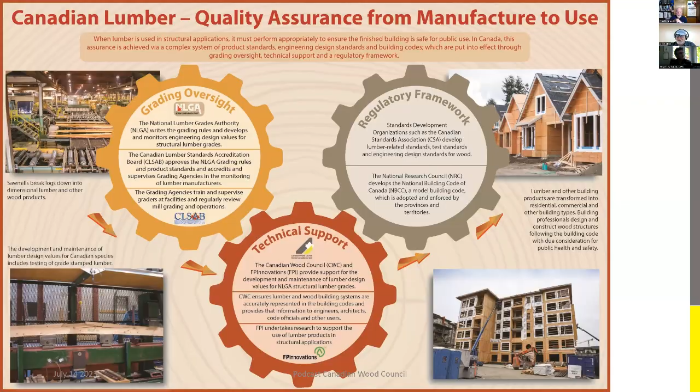Yeah, we have the American Wood Council, and we have a number of other groups that we work with: the APA Engineered Wood people, Woodworks, Think Wood, and SLB. American Wood Council is very closely aligned with the Canadian Wood Council. We both deal in codes and standards work, and actually Canadian Wood Council is a member of the American Wood Council.

Actually on Sunday, I'm going over there for their annual set of technical committee meetings for the whole week. Where are they located? They're in the Washington, D.C. area. Okay, interesting.

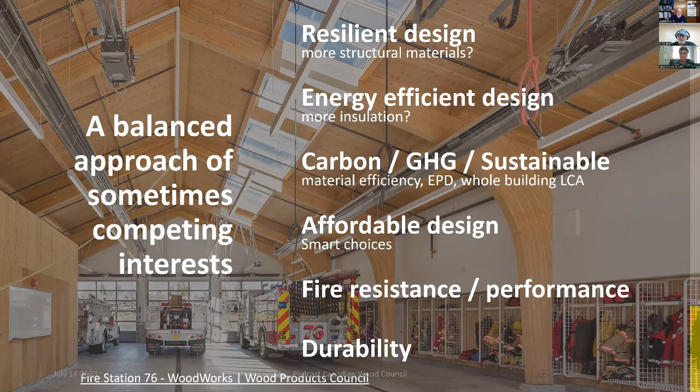Now, we called this show Building Science and Wood, a balanced design approach. Can you talk a little about what is meant? What should our overall philosophy be in designing? Let's start with that and then get into more about the balanced design approach. Sure, yeah, there's a whole pile of competing aspects to designing a building.

Sometimes I say competing because, for example, with resilient design, you may want to use more materials. You likely want to use wood sheathing to resist the wind and seismic loads for your building. But some builders in certain locations say, hey, I have another panel product called insulation, and I want to use that instead of the wood sheathing. So that competes with it. Now, of course, you can use both—you can use the wood sheathing and on top of that put some insulation.

That's the best approach, but there's also the affordability side of things. So which one do you pick? Again, you want to pick both, but it does play into the decisions builders make. So we have resilience, we have the energy efficiency aspect, we have the affordability aspect.

Now, when we go back to energy efficiency, the more insulation the better, right? You want a highly efficient building envelope. But that impacts the carbon footprint, and there's huge scrutiny worldwide now, certainly in Canada, about having a decarbonized environment—low carbon materials. So you don't want to pick too many materials, and when you do pick materials, you want ones with the best carbon footprint available. Then, of course, there's fire resistance and durability as well.

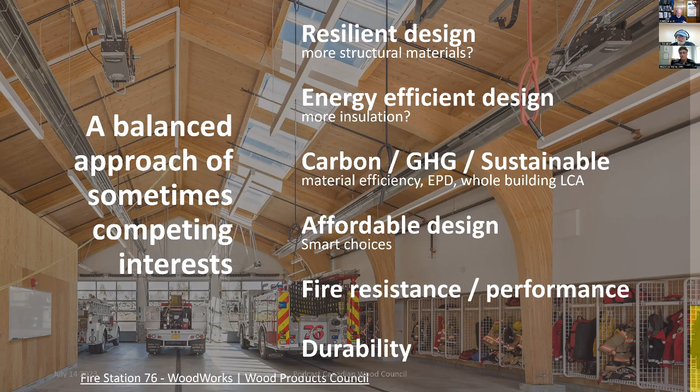I've got in my notes from talking with you earlier in the week that a wood frame house can resist an EF2 tornado. Is this any wood frame house, or does it have to be built in a specific way?

That's a good question. There's even a Globe and Mail article, a Toronto newspaper, that talked about whether houses are keeping up with extreme weather, and I gave an interview for that. In general, wood frame homes perform very well historically, both in the US and Canada, in even the worst of earthquakes, with just a few details paid attention to. They act very well, but no, not all homes can.

This is actually very front of mind today for me, because just yesterday there was probably an EF0 or EF1, very low tornado, but it still wrecked 125 homes only a few miles from my house. It was a close call. So that's first and foremost in my mind, that component about resilience.

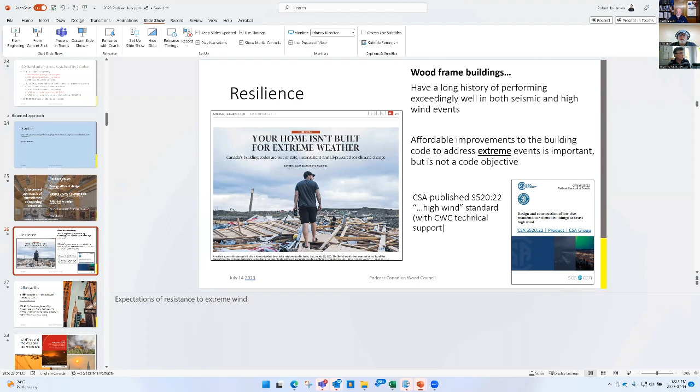We do have some strategies, and they are in this S520 standard. It's a brand new standard in Canada that deals with how to make sure your home is highly resistant. I'm going to go to this slide that describes what I talk about in about an hour-long presentation, and boil it down to about 2 minutes here - how to design a highly wind resistant home, based on the concepts of that CSA S520 standard that's just brand new.

It was published in 2021 or 2022, I forget now. First step: making sure the roof sheathing is attached well. The standard describes a better way of ensuring that the roof sheathing is fastened well. If the roof sheathing lifts off, your house is going to be toast from either water or the extra wind load that hits it.

Then gable end roofs - those triangular portions of wall that go up to the roof line on certain homes - those are very susceptible for a few reasons. One, they're not constructed as well. Two, they're higher up, so they have higher wind loads.

And then just making sure everything in the upper framing is connected to the lower roof framing better. Those things include chimneys, if people still have chimneys attached to their home, or even dormers. I've seen a number of houses where the dormer has flown off.

Ensuring, just like the roof sheathing, that the wall sheathing is attached very well, with nails that are perhaps even better than commonly used. There's something called the roof sheathing ring shank nail - it's kind of like a combination of a screw and a nail, and you can drive them in with power nailers, but those allow the sheathing to be fastened a bit more securely.

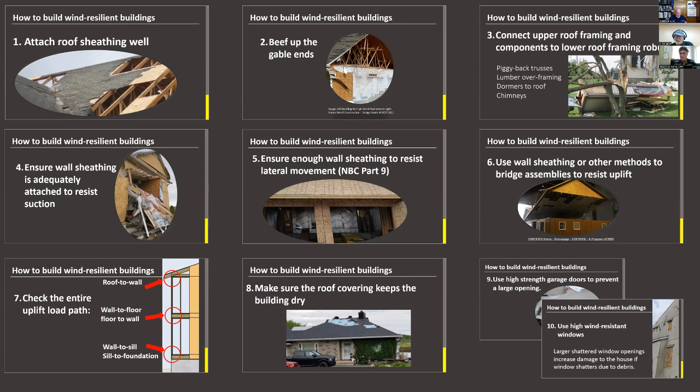Now, another topic we hear a lot about is carbon and climate change. I wonder if you could touch on that and how wood construction stacks up essentially with respect to carbon.

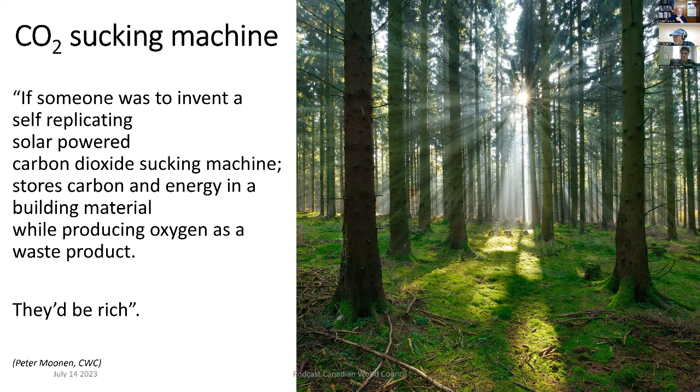Sure. I like to quote a colleague of mine first by saying, if someone was to invent a self-replicating solar-powered carbon dioxide sucking machine that stores carbon and energy in a building material while producing oxygen as a waste product, they'd be rich. It's my colleague from the Canadian Wood Council who says that. And of course, he's referring to trees, and they absorb carbon.

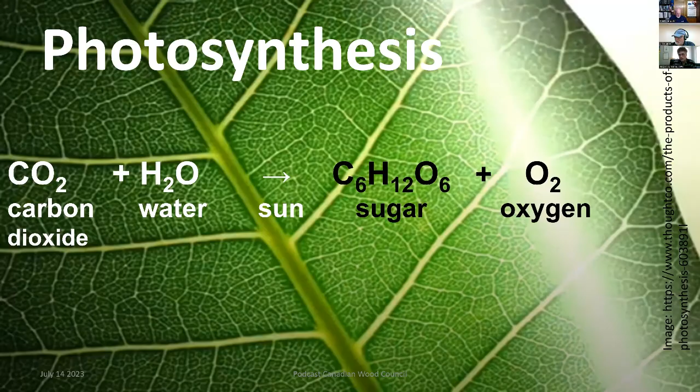They do this at their big plants, their factories of storing carbon, through what we learned in high school—photosynthesis—where the carbon dioxide goes in, combines with water and sun, and produces what ultimately turns out to be the wood, the sugar that converts to wood. Beneficial to everybody is the oxygen, so the carbon dioxide is then changed into oxygen. And what I like about that is the wood then stores the carbon from the carbon dioxide and releases the oxygen.

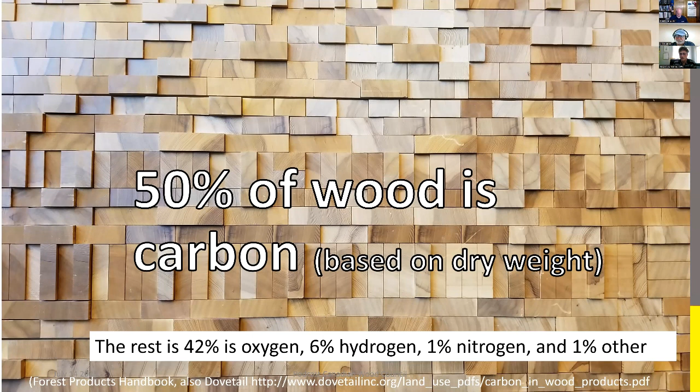And that's what the world is looking at as a culprit for climate change right now. So wood is 50% carbon—that's a fact you can look up in many places, including the Forest Products Handbook. The rest is oxygen, hydrogen, a few other things that are less important. I can go into details using the periodic table, if you'd like, about how the math works out, but chemistry wasn't my forte—that's why I went into structural engineering.

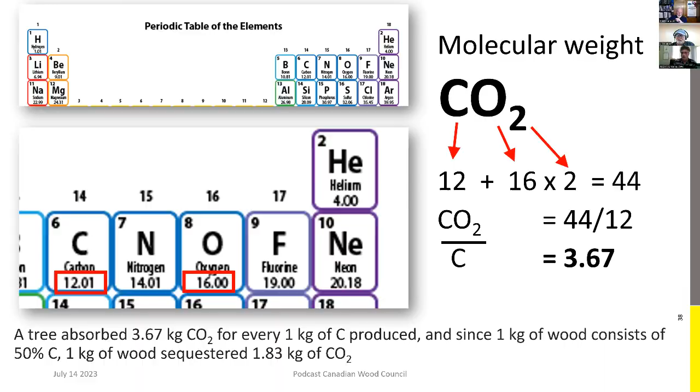But there's something called the molecular weight, and that's the comparison between carbon and oxygen. When you have carbon, it has a molecular weight of about 12, and oxygen is 16, and there are 2 oxygen molecules in carbon dioxide. So when you ratio the carbon dioxide over carbon, you get a ratio of about 3.67. That all boils down to, if wood is 50% carbon, and you do all that math with the periodic table, each kilogram of dry wood has sequestered over its life 1.83 kilograms of carbon dioxide.

You can think of it like this: we weigh roughly 200 pounds, but we eat a lot more than 200 pounds of food as we grow over our lifetime. The tree does the same thing with carbon dioxide. It's taking in carbon dioxide, sequestering it, and building up its muscle, call it, in dry wood. That's what's very beneficial to the environment.

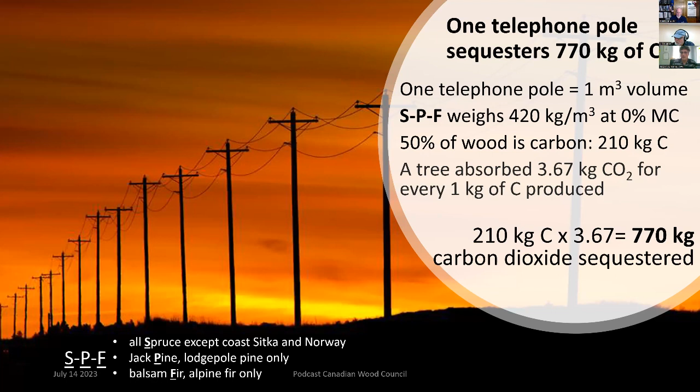Why do we care so much about this carbon issue? We care a lot because as we build more efficiently, in the last 10 or 15 years we've had this focus on building energy efficient homes. That's great, we're getting more energy efficient homes. But as we build those more energy efficient homes, the proportional impact on the environment due to the materials increases relative to the operational energy used to keep the house warm or cool.

And so that's why it's being increasingly scrutinized, what materials and the impact of those materials have on the environment. It's not just the operational energy in the form of operational carbon, but also what we call embodied carbon—the carbon that goes into the atmosphere as a result of making the materials. That's why we need to focus on carbon, and really we've got to focus on decarbonizing.

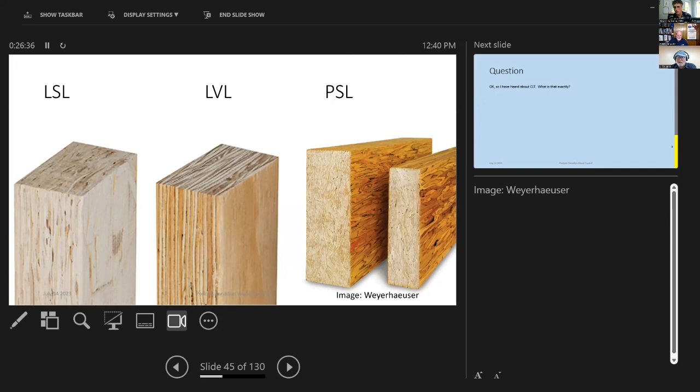These products I'm showing on the screen now: laminated strand lumber, laminated veneer lumber, parallel strand lumber. Those are all engineered materials that are also part of the mass timber family. But those are older ones, and I bet a lot of your listeners have heard of those before. They're very popular - rim boards, LSL all the time.

CLT is a little newer, but there's also even newer stuff coming around. Well, it's new and it's old - nail laminated timber has been around actually in some really old, 100-year-old buildings. But now it's part of some standards that have been developed. In Canada, at least, there's a new standard called CSA O325, talking about how to make sure the quality and performance of this is done correctly.

And that's just taking a bunch of 2x4s or 2x6s, not sure how deep they would go, and nailing them from the large side into the next piece. So the strong dimension is vertical - it's like a bunch of closely spaced floor joists, all tight together and nailed, forming very strong floors. They could even be stronger than cross-laminated timber because they're all in their strong direction. So that's another part of the mass timber family.

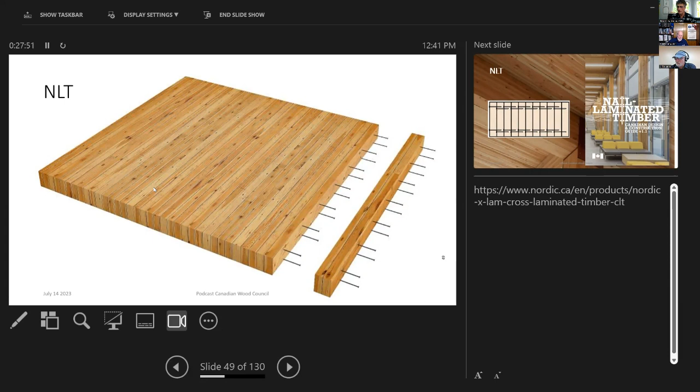And even newer, especially environmentally friendly, is something called dowel laminated timber. It takes the same concept - laying a bunch of 2x4s, 2x6s, or 2x8s on its edge - but instead of using steel nails, using wood dowels drilled in. That's really cool because the end-of-life story for these materials is really good; you can always reuse them. There's no danger of cutting nails with your saw, even on site, you can cut a hole in it without damaging your saw. So that's another mass timber product.

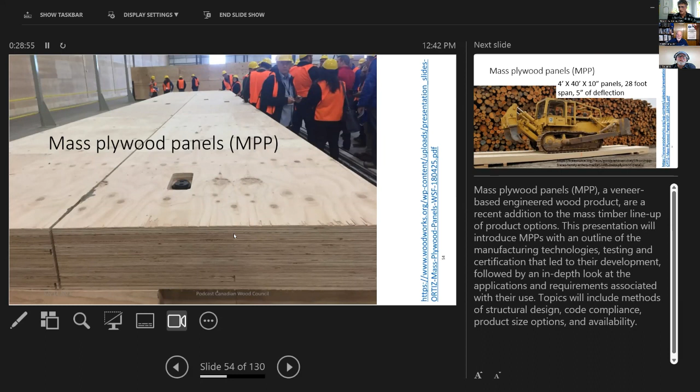And then the last one I'm not too familiar with, but I know is around, is mass plywood panels. So if you visualize going to Home Depot and looking at the stack of plywood panels on an orange racking system, but instead of them all being loose, they're all glued together with adhesives, and those are used to span quite far as well.

What I'm now showing on my screen is a big loader, a bulldozer type machine, sitting on top of a 40-foot panel. It's 10 inches thick, 4 feet wide, supported on two supports that are 28 feet apart, so it's cantilevered a little on each side. This big, heavy chunk of machinery is causing this mass plywood panel to deflect 5 inches, which is pretty cool.

Now, one of the things I think our restoration people would ask you is about the durability of these products when exposed to water. We get that a lot - are they more problematic when exposed to water as opposed to a 2x12 or something like that?

So the mass timber in general, or - well, I guess it would be different for each type, huh? Yeah, it would be, but really, first of all, they just need to be able to dry. They're not going to rot in a few days. You do want to dry them as quickly as you can. They're not as susceptible to mold as, for example, papery products are, but design is important - having correct design and construction details is very important.

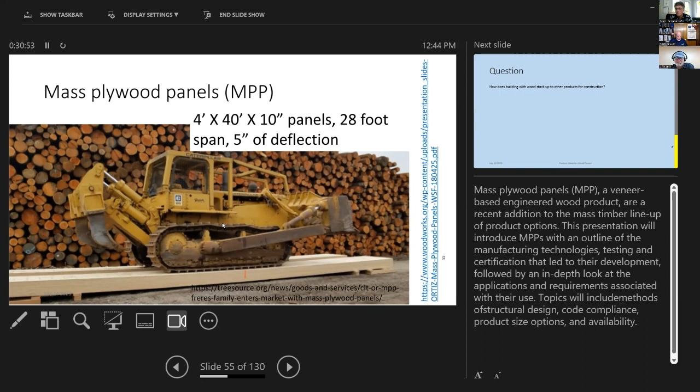How does wood construction compare? We see a lot of wood construction in North America, but over in Europe and other parts of the world you get more concrete, cinder block, even down south in Florida. How does wood stack up as a product for construction - why wood? Well, we talked about the carbon sequestering aspects of it.

It's also a very good natural insulator - I can talk more about that later, but it insulates much closer to actual insulation than concrete and steel do. So if you're using that in, for example, a wall system, you can get a much higher performing wall from an insulation perspective than a steel stud wall. It also has a very good strength-to-weight ratio and is very lightweight. I've seen cases where they could use wood framing on a site where they couldn't use a heavier material because of the soil, or what was below grade like tunnels or other infrastructure. Wood is also healthy to have in the home. And then, as we get to these heavier mass timber products, there are bigger, taller opportunities for wood to be used as well.

How tall is the building? Let's put it this way: the tallest buildings using wood construction, how high can we go now? There's probably not a specific limit, but in Canada there's a building called Brock Commons in British Columbia, on the west coast, and it's 18 stories out of mass timber—17 stories of mass timber plus one concrete. It can go tall, and there are others being built around the world, not just in Canada or the US, that are either planned to be much taller or are in the works and slightly taller.

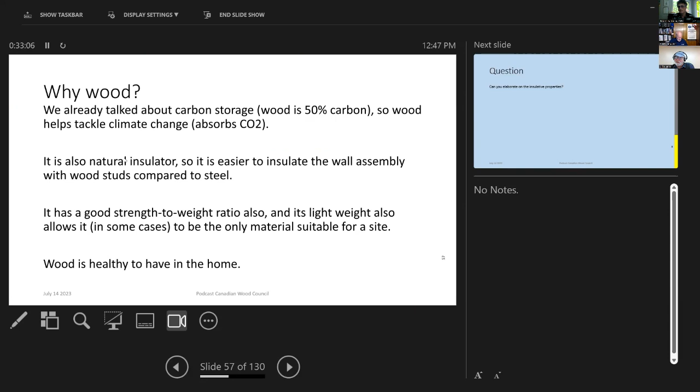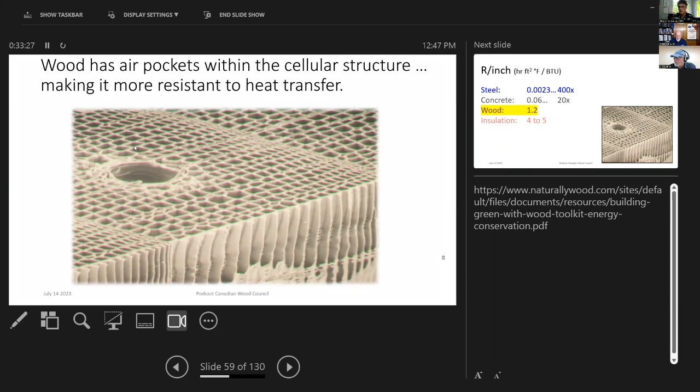Could you elaborate on the insulation value of wood? Sure. The reason wood has high insulative properties is the air pockets within it, which allow it to become very insulative. Wood has an R value of about 1.2 per inch—that's US terminology. Insulation itself might be 4, 5, or 6 R value per inch. Concrete is 0.06, and steel is a conductor so it doesn't even count. So wood is about 20 times more insulative than concrete and 400 times more insulative than steel, and it's all because of those air pockets that make wood naturally an insulator.

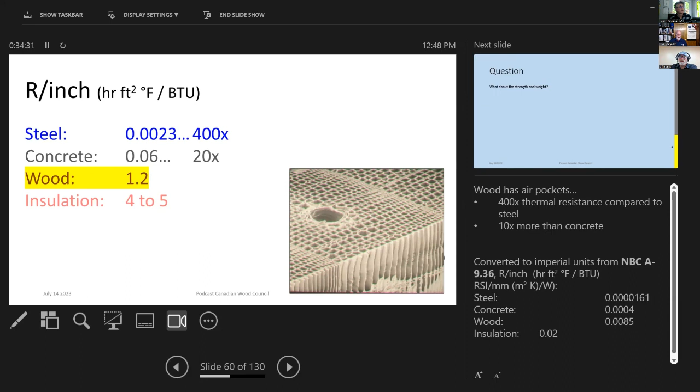Going back to the fire perspective, I think a lot of people, when they see these large wood buildings, are concerned about fire. I wonder if you could touch on that topic for a moment. Sure, yeah.

I'll talk about fire, but first I wanted to highlight that we used to build taller buildings out of wood, and then restrictions came into the code, lowering the permitted heights. You asked how tall we can go now—Canada built a tall wood house in 2017, Brock Commons, about 57 meters. Another was built in 2019 at 85 meters, and another is planned somewhere in the world at 300 meters. I don't know exactly where, but you can see they're growing, because the code recognizes that wood can safely be used.

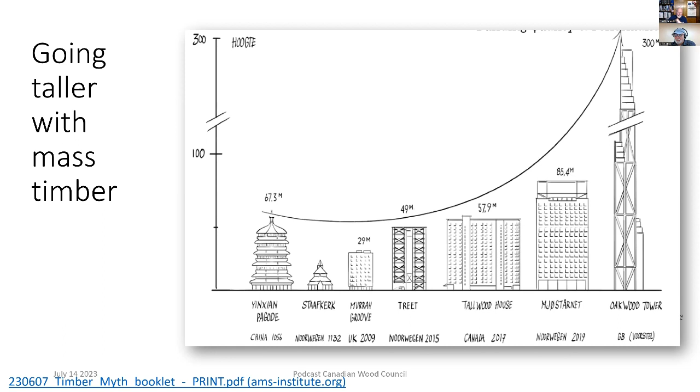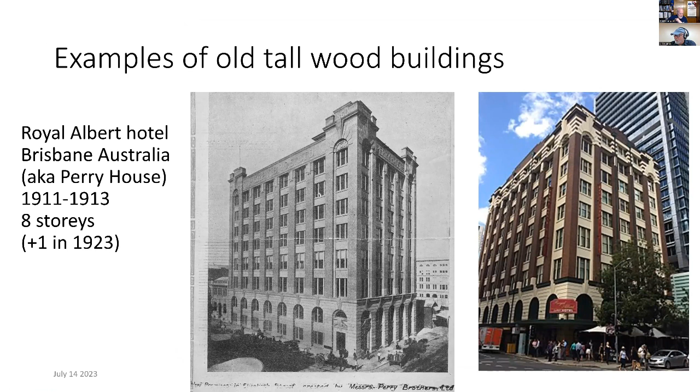But there are examples of old wood frame buildings from before. There's a famous one in Australia called the Royal Albert Hotel, built in the early 1900s with 8 stories. The outside is stone or brick, but the inside structure supporting it is heavy timber frame—that's an example from Australia.

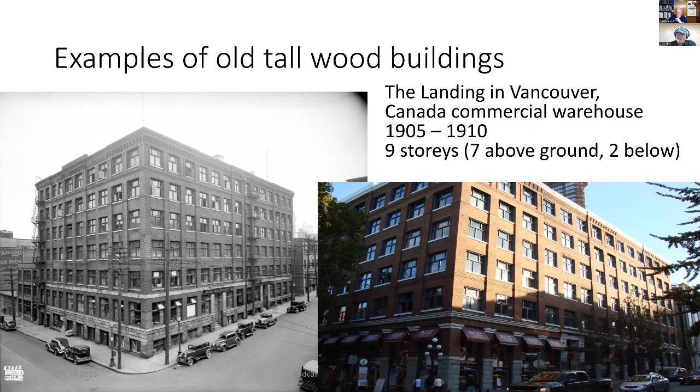In Canada, we have one that's 9 stories, also built in the early 1900s—7 stories above, 2 below—with a nice little pub inside, which I've visited when I've been to Vancouver. You can see the inside has a nice timber frame in there.

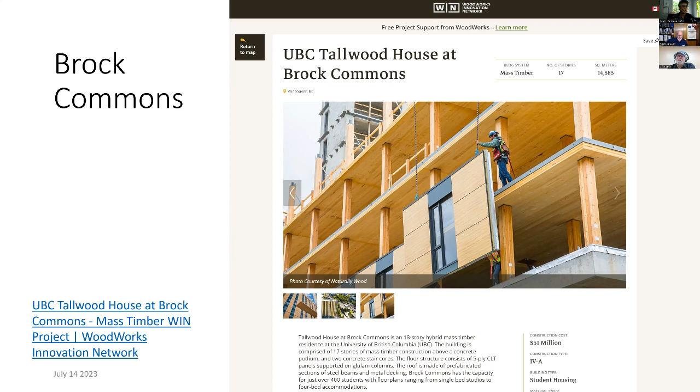And then you were going to go over fire. Yeah, the thing about mass timber is that it performs predictably. I have a structural engineering background, but our team has fire experts too, and they tell me the heat from flames drives the moisture inside the timber, making the center less susceptible to fire. Also the surface chars, as you can witness at a campfire—you don't start a campfire with a large log, you start with small kindling to get it really hot first.

And so it chars, and that actually forms a protective layer. So that was our theory. It is reality, but we did test that.

We tested it in Canada last summer through what's called a mass timber fire demonstration test program. And it was actually the largest mass timber fire test in the world, I think it still is. When I give you some of these slides, I'll give you the link as well, there's a whole microsite link you can see that goes over the results of this.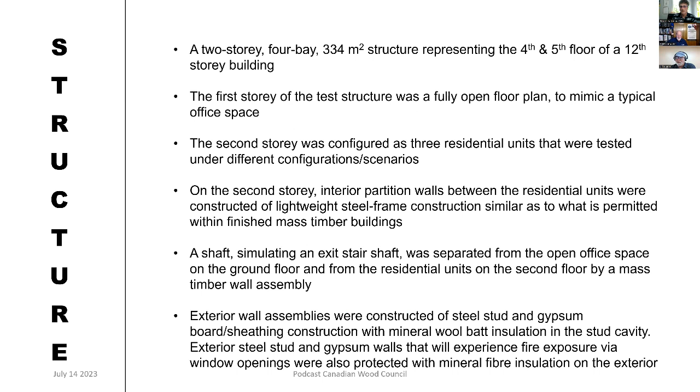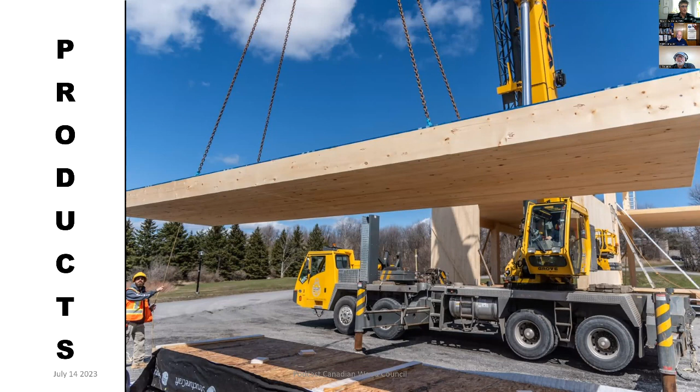But in general, I'll go over it quickly. It was a 2-story, 4-bay structure. If you have your calculator handy, it's 334 meters squared building, so whatever that is in square feet, probably around 3,000 square feet. And so it was all mass timber. What I thought was really cool, for those viewing this, that's the size of the mass timber that was in there for a floor system. Wow, it's showing about 12-inch deep.

This looks like a nail laminated timber being hoisted into place. And I'm showing now an image of this 2-story building. It got really hot. I was there. I witnessed this test.

So hot that those pylons that you see there melted. The back of the TV screen, that was about the distance we are now from this image, started to melt, and all the audience had to go back a little bit further. So it became a very hot fire.

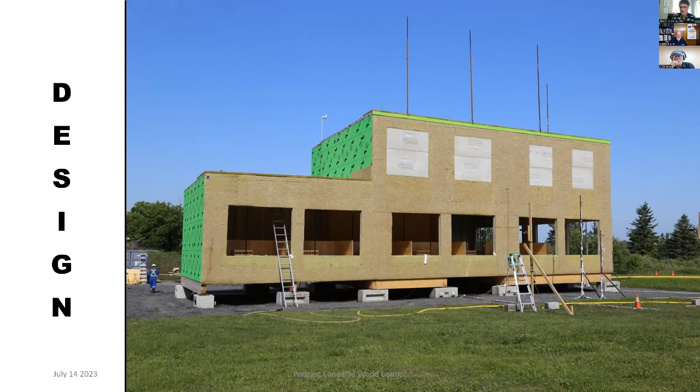But in 25 minutes, it extinguished itself. It developed this charring effect and went out by itself, despite the fact there was a bit of a breeze, which helps propagate the fire. And it went out all by itself. There was, of course, a fire crew handy in case it didn't, or in case there was another problem, but they weren't needed, and it just died out. So it's not just all fantasy. It does actually go out.

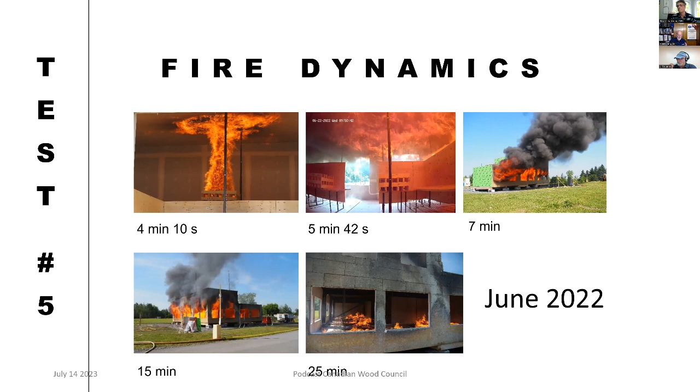That leads me to another question here. Now, you showed that charring on what looked like, I don't know, a 4x4 or a 6x6, whatever it may be. Does the same thing happen in a forest fire?

That's a good question. I bet you there's a lot of logs that are falling down where only the outside is damaged. It seems like you might be able to still use some of that, but I don't know. I always assumed it burned all the way through, but now I'm starting to think, well, maybe it doesn't. Maybe there's still some use for that. It's possible. It might not be cost effective to do, but it's possible.

Interesting. I'm not a wildfire expert. I know that we want to prevent the fires, and I know how to do that with a house, but from a wildfire perspective, it's a very good question.

Hey Joe, one of the things that happens with wildfires is that if you're having pine, or spruce, or fir, those softwood trees, you have a lot of oil. They don't have leaves, they have cones, and that oil contributes to it as well. It's a built-in oil source, actually.

And those wildfires, possibly because of what you just brought up, Cliff, are super hot and they can jump like a kilometer even, from what I understand. They can jump. The heat from it is so hot it can jump a long distance across a body of water and keep propagating in the adjacent forests.

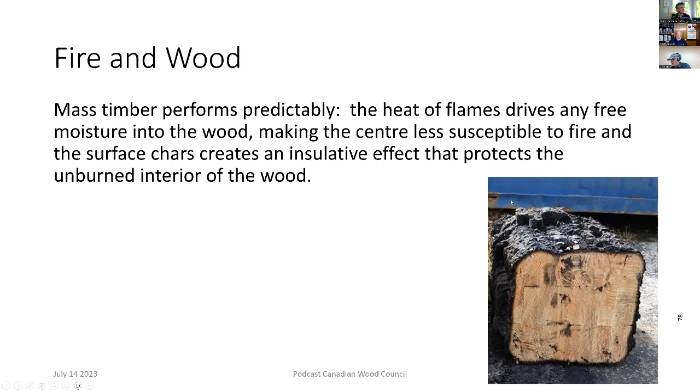I've got another important topic or two here. I'm going to have to skip the roundup because if we go to roundup, we're going to not be able to give you controls back according to my engineer here. So we'll skip what we call our roundup here. But I wanted to get into environmental product declarations because I think that's an important topic, and we had prepared to talk about it and didn't get a chance yet. Let's get to that. Okay.

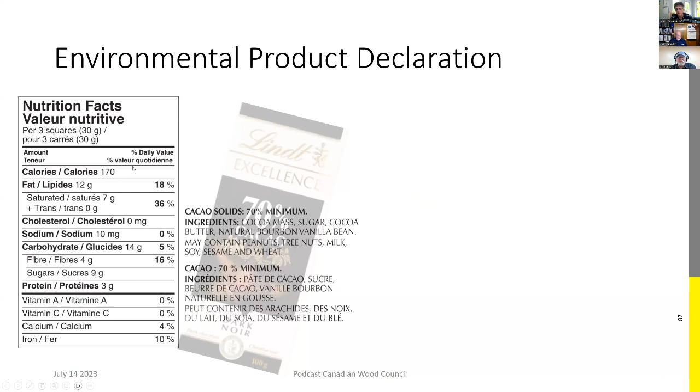I always visualize environmental product declarations like that chocolate bar. I have another one right here. And the back of that chocolate bar has a list of ingredients in it, the nutrition facts. An environmental product declaration is very similar to the nutrition facts of food. So, for a given size or unit of that chocolate bar or that food, there's the nutritional aspects of it, or there's the life cycle impact measures for that wood product.

One of the main ones we talk about now is the global warming potential, and we equate that to the carbon dioxide equivalent in kilograms or whatever units. So an EPD gives you an environmental product declaration, then gives you an idea of the impact that this product will have in your building. And people are tempted to compare materials based on their EPDs.

It's not strictly permitted or good, unless they have the same kind of use. So you've got to compare it in the right way to be able to do that, and then you can, is my understanding. But it certainly gives you an impact for that material, and that's what it's all about.

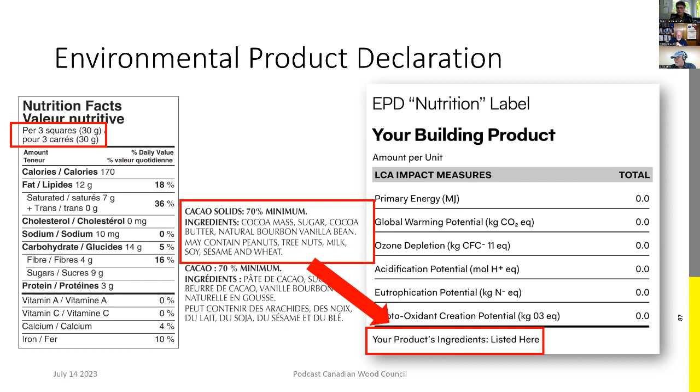And we do recognize the importance of EPDs. They're becoming more and more important. The wood industry has been putting out EPDs for many years and decades even. We tag team with the American Wood Council to put out industry environmental product declarations for a number of wood products, and they give you all that information I was just referring to. Of course, as I mentioned, the main one is the global warming potential. But more and more people are saying, okay, we want all materials to have these environmental product declarations. So I think this will become more important, and it'll also have to become more regionalized as well.

And the last thing I wanted to make sure we got in here is, what do you think? Net zero is a big thing, especially here in the States right now, the DOE net zero building program. We're trying to build in a way that's net zero. What do you think is a good wall for net zero?

I think a good wall depends on all the rest of your building, but I think a good wall is probably at most an R value of 30. And it'd be wood framed, and it'd have to be with exterior insulation. But remember, going back to the very early part of this podcast, we want to use a balanced approach for that wall.

A good wall is going to have a decent or good enough amount of insulation, R30 probably at the most. It's also going to have the ability to resist wind loads and earthquake loads, so it's going to have some form of sheathing on the outside, wood sheathing or structural sheathing, OSB or plywood. But it's also going to consider the environmental impact.

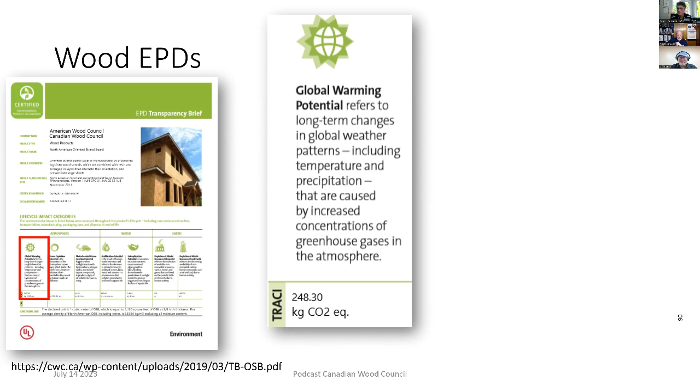Thank you. What we didn't get through is the biophilic aspects of wood. We also didn't talk too much about the indoor air quality of wood, even though that's your show. But in both regards, wood is pretty favorable in those two. So we could talk about that at some point down the road.

Hospitals are using wood to make people feel better. Actually, it's been documented to show that if you bring nature, like wood, into a building like a hospital, they heal quicker. They're on the fast track a little bit better when you have an environment such as that.

Very interesting. I think sometimes people look at these shows and think we're just going to talk about wood, and they don't realize how wide a range of topics we're going to be talking about. It just looks like wood, but we've gotten into quite a few things. I was very interested, and I'm glad we were able to get you on.

I look forward to seeing you at summer camp. Yeah, very good. Yes. Thank you for the opportunity here.